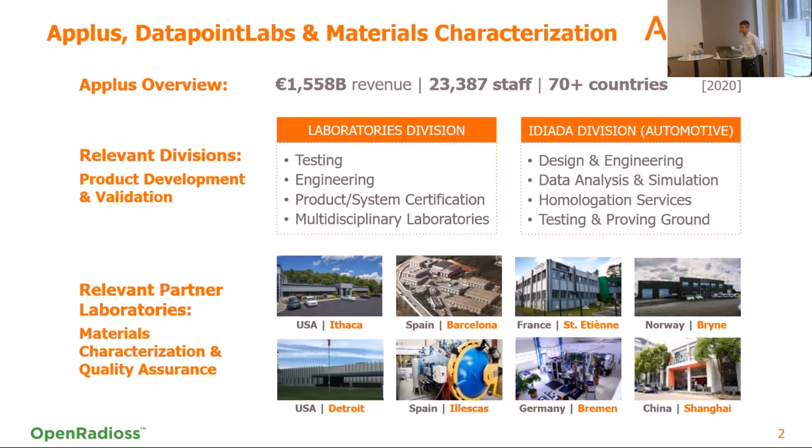So first of all, Applus Group is a multinational company that has many different locations, and one of these locations is Applus DatapointLabs, which is located in USA, in Ithaca, New York, and we are mainly focused on testing for CAE and material card calibration. So we have been in this business for already 30 years.

For sure, I'm not 30 years of experience right now, but my colleagues have been working in the company for more than 25 years. So we have a deep knowledge on material testing, especially on polymers, but also other kinds of materials. We have accreditation for ISO and Nadcap in terms of aerospace and defense for metallic and non-metallic materials.

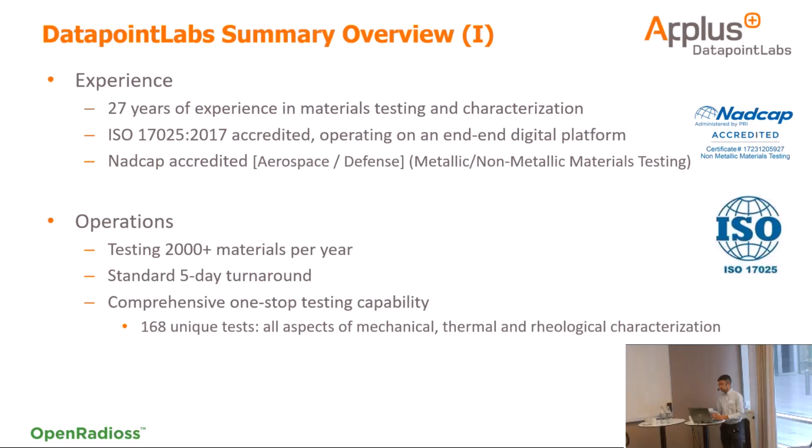And we usually test more than 2,000 materials every year. So we have a background of more than 40,000 materials. And our usual turnaround for the testing data is just 5 days.

So in terms of capabilities, as I said, we test many different material types, from plastics, composites, foam, rubbers, to more fancy and funny stuff like chocolate or some kind of food. We have capabilities to not only characterize materials at room temperature or quasi-static, but also at different ranges of temperature between cryogenic temperatures to high temperatures with any kind of conditioning that you need for your application.

And also we have deep expertise in terms of nonlinear characterization, post-yield behavior, any dynamic situations like drop, crash, impact, fatigue. We do many creep tests right now, so we cover most of the applications, and not only for mechanical, but also for thermal and rheological testing.

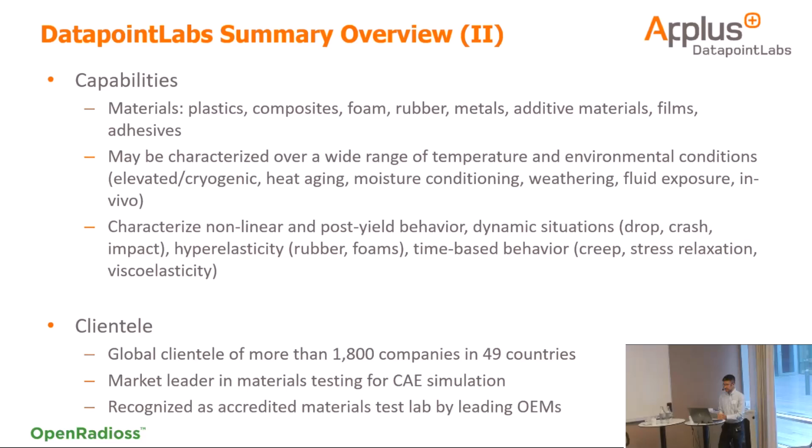As it's written here, we have a global clientele of more than 1,800 companies in 49 countries all over the world. And we are market leaders in providing testing for CAE.

So basically what we do on a daily basis are three different things. We have an extensive catalog of tests, which we call TestCart. There you can find any kind of characterization that you need. So we test it, we provide the data to you, and you then play around with your own data.

But then one of our most successful products is what we call TestPaks. TestPaks were designed for CAE engineers that have a lot of expertise on CAE, but they don't know about testing, they don't know about materials. So here we provide a pack that not only includes the material card, but also all the testing that needs to be performed before you have this material card.

And then we provide the material file in the format that is needed according to your CAE solver, and we are partnered with more than 36 different CAE software.

And finally, we have what we call CAETestBench, and this is just the last step before one can be sure and confident that our material card works, which is validation of the material card. And this can be done in two different ways. We can do it by using the same data that we use to calibrate the material card.

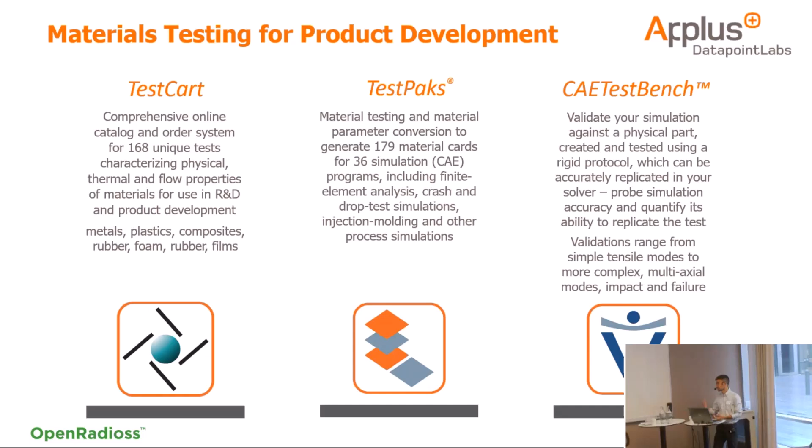And why is it important to have tailored material cards and not anything off the shelf or any data that you can find in any textbook or on the internet or wherever? So at the end, a tailored material model is essential to guarantee a certain % of accuracy in your application. Because at the end, you are calibrating a material model using data tested focusing on your application.

So let's say that you find data of any tensile test or whatever, but in your application, the loading case is a different one. It's biaxial or shear or whatever.

So it's important to take this into account. And also, this can reduce the number of physical tests once you have designed your part and built your part, and then you need to prove that it works, because all this iterative process can be done in the simulation world.

And this is something that, for the last conferences that I have attended, I think it's a common problem for us, trying to convince people and managers that simulation is a powerful tool that can be used more and more. So we can avoid the expensive testing and long tests in terms of component, system and subsystem level.

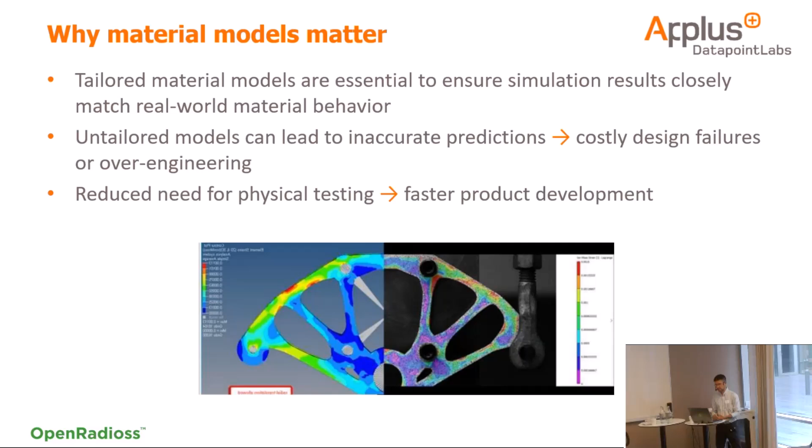So the first step is to have a really good material model that can be trusted, and this is why we cannot escape the testing phase in this part. So for today, I will show you a brief overview of 3 different material classes that we are used to work with. Polymers, foams, and composites.

And we chose those because I believe they're kind of the complex ones that we have right now. And polymers change a lot depending on the formulation, depending on the conditions, depending on the strain rates. Even the same material, with the same provider, but manufactured in 2 different plants or on 2 different days can give you different results in terms of testing. So they are kind of funny to work with.

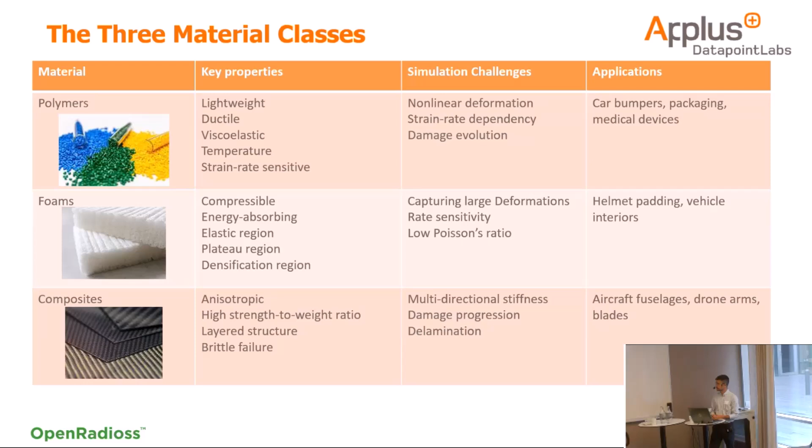And foams and composites, as you know, include many complexities like anisotropy, crack evolution, different failure mechanisms. So they're kind of also funny to work with. So the material models that we are presenting, it's Law 76, which is called SAMP, that was developed, if I'm not wrong, by Paul Dubois and his team.

At the end, it's a multi-yield surface where you need data from different loading conditions to develop this yield surface that then is used to calculate the proper behavior of the material. Then for foams, it's the foam tabulated model, which is kind of similar to or based on the Fu Chang model. And for the composite model, it's Law 25 and Law 125. They are pretty similar to MAT 58 for Dyna.

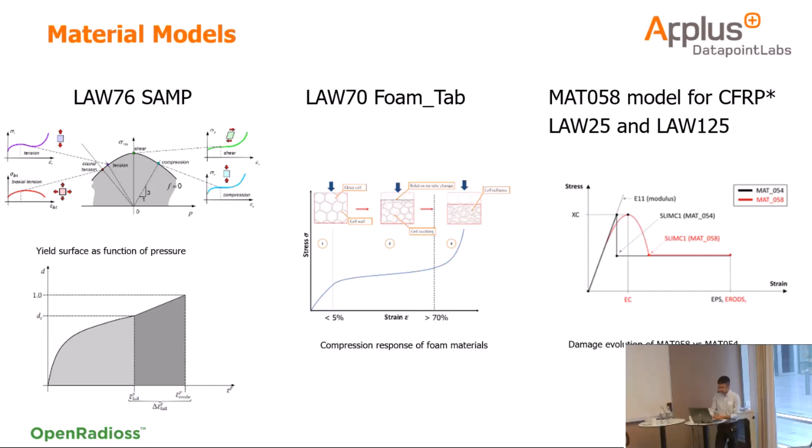So for this complex material model, which is SAMP in terms of polymers, first of all, it's not recommended for reinforced polymers, but this is something that we are already using with reinforced polymers, so we can achieve the process on how to calibrate for reinforced polymers with more or less good success. So we use an iterative process where optimization is required.

So you start with the simple load cases that you have tested, so tensile, compression, shear, and notch. Then you calculate the parameters, check if there is an error between your simulation and your experimental data, and you iterate again and again until you have validated these simple load cases. Then you move to the more complex conditions, which are usually 3-point bending and impact simulation. And then you adjust what you need according to the results until you have the proper solution.

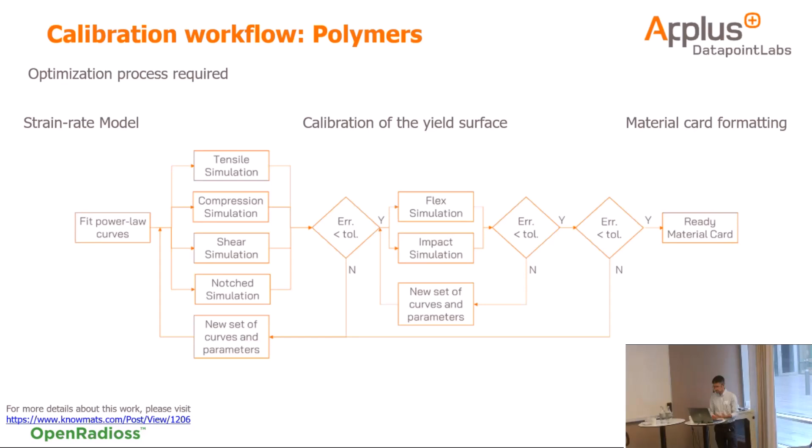For the foam, the process is kind of more straightforward. So you have a bunch of data directly from the experimental side. In this case, it's strain rate dependent. So we have a bunch of curves. Then what we do is we reduce the noise, reduce the number of points. We extrapolate the data up to usually between 20 and 200 megapascals, depending on the contact surface and so on, at the rear end. And at the beginning, we extrapolate the tensile.

For this particular model, I think we can also introduce a tensile curve, but we usually go this way because the application is more for impact. And then once we have this extrapolated curve, we filter the first derivative. And this step, suggested by Marian, is really the key to guarantee the stability of the model. So as you can see, the yellow curve is the first derivative of the curve. You can see a bunch of noise and sharp edges. And when you take the first derivative, you can filter it, you can smooth it out.

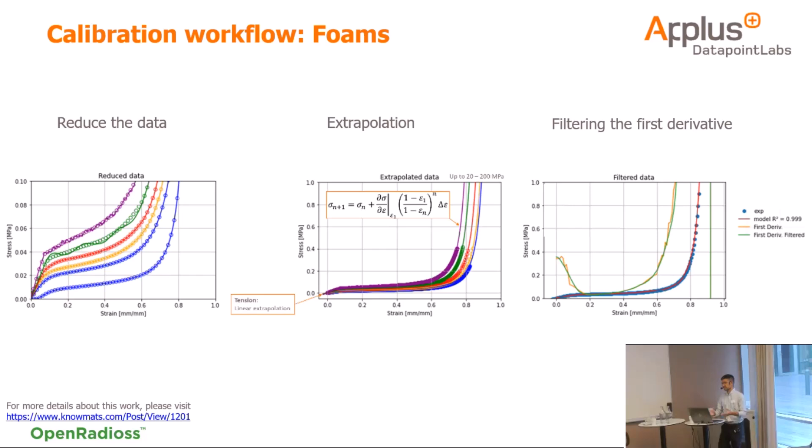And then you integrate this curve again, so you can get the red one, which is kind of almost the same curve as the dotted line. So in this way, we can achieve a good stability for the model, particularly for foams and the large deformation of the elements.

And finally, for composites, it's kind of a mix between both. Usually, MAT 58 or LAW 25, it's pretty straightforward from the data. But then sometimes if you want to include some damage evolution, crack propagation, or delamination, you also need to do some iterations on your process in order to get the right parameters and adjust whatever you need to.

And for all these iterations, we have developed our own tool, mostly in Python. It's been integrated for LS-DYNA and OpenRadioss, so we can run all our simulations through this iterative process and be kind of efficient in this way.

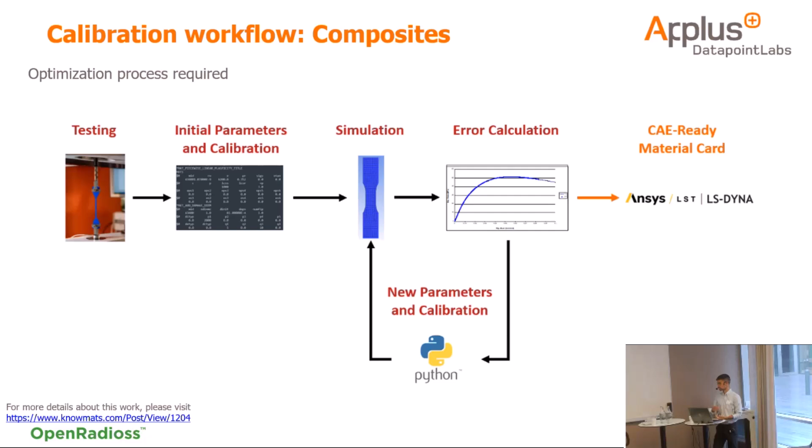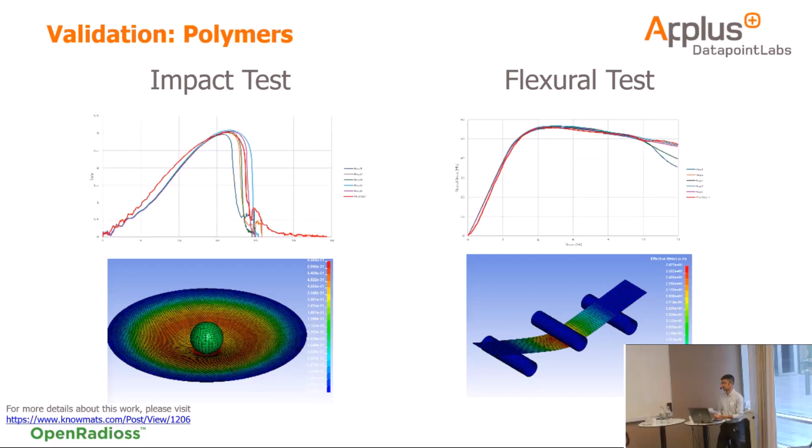So as results, I just said it for polymers, a couple of examples for the impact test and the flexural test. As you can see, we can correlate the results pretty well, even though, as I said, this was a reinforced polymer, which is not recommended for some, but we can do it without any issue. In terms of the foams, sorry, there was the video comparison, but I don't know why it's not working.

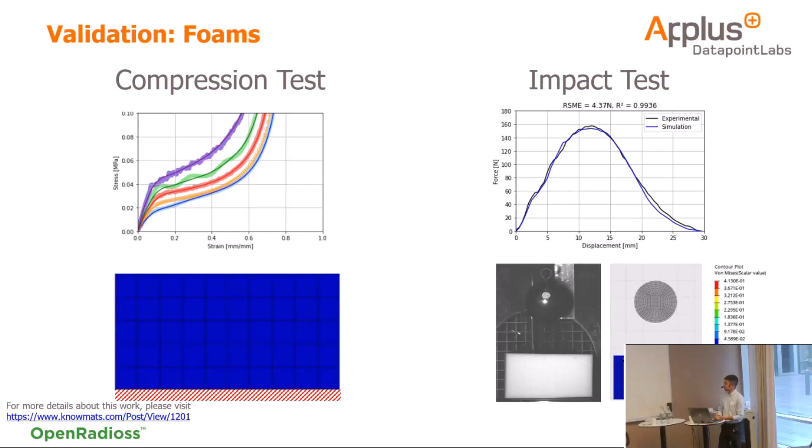You can see for the simple test of compression cases and the strain rate, it matched the experimental data pretty well, and for the impact test, it matched perfectly, both the loading phase and the unloading phase. And finally, in composites, for this project, we validated just the pure modes, 2 tensiles at the different orientations, and then the shear, which was a little bit noisy in terms of simulation, but it worked pretty well also.

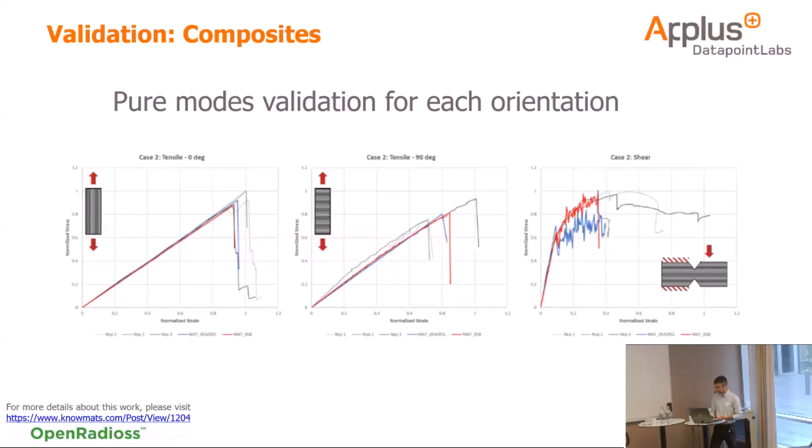So a brief summary of these 3 models. For polymers, as I said, they are strongly strain rate dependent, and the damage evolves progressively. So here, what I usually recommend is use as much DIC as you can pay, because it's really the key to having a really good set of data that you can then play around with, tune your model and learn a lot from. It's important not to stick to just tensile or compression and so on. So test as much as you can in terms of notch tests, different strain rates, and so on.

So we have a really huge amount of data available, and we could avoid guessing what's happening with the polymer after some of the conditions, because this is a big problem when simulating or calibrating models for polymers, that they change the behavior from ductile to brittle, from brittle to ductile really fast. And if you don't have the data available, it's impossible to guess and calibrate a good model, and then when you apply it to your own applications, you may say this model is not working. And that's because we are missing some of the data, so we didn't calibrate the material card properly.

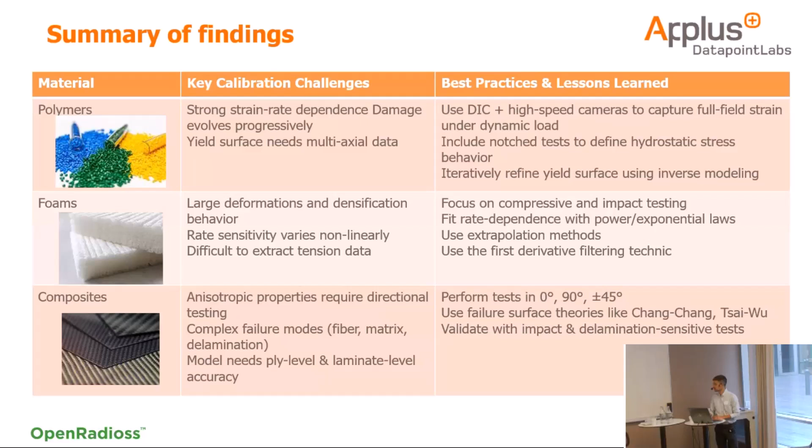And finally, for composites, strain rate dependency is not that high, at least in the ones that we have tested. It's important to define which modeling strategy you want, if you want to go by ply or more of a laminate model or any homogenization or whatever. But again, if you have a composite, test it at different orientations, under as many different conditions as possible. So that was all for me.